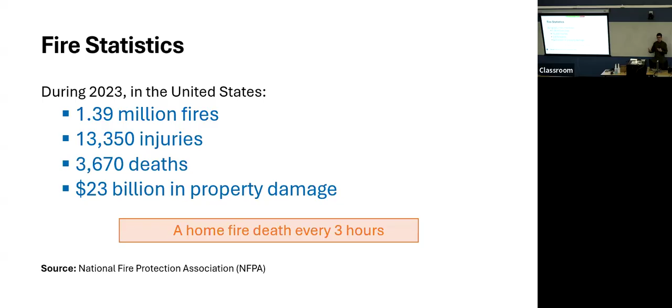And we have to think about it, as engineers, we're going to be building our infrastructure and buildings where people are going to live, work, study, get treated in hospitals. So it's really important for us to understand what the actual behavior of a fire is.

First, let's say we're all here in this classroom having a good time learning about fire safety. And maybe somebody lights up a cigarette in the back of the room, or there's a candle and it gets on the floor. And then we have a carpet, right? This carpet's going to start burning, and that burning is going to start propagating throughout the surface of our floor.

We have wood tables, you guys have your backpacks filled with books, papers. All of these are combustible materials. And as the temperature keeps rising, the flames and the smoke and everything is propagating from one material to another, right?

We even have plastic chairs over here, so a lot of combustible materials inside of this room.

Once we ignite, these temperatures are going to be increasing slowly right after the first ignition, up to a point we call the flashover. Flashover is when these materials are burning, they release gases that are very hot, and they start accumulating on the ceiling because hot gases tend to go up. So they accumulate on the ceiling, and the temperature there becomes very high, radiating into all the materials in the room.

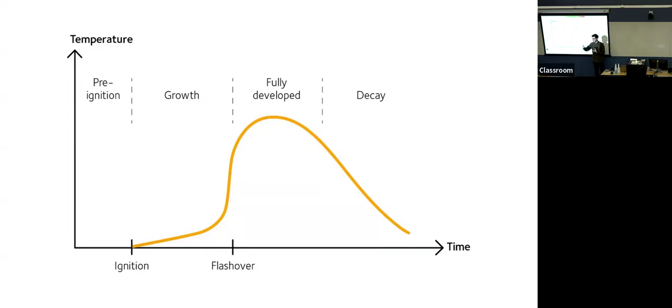As you guys can imagine, if these columns collapse, the ceiling is going to collapse here. I'm going to have a very high load on this floor, and then the entire building might collapse.

When we're designing the structure of buildings to resist fires, we have one specific property called fire resistance. Do you guys know how we measure the fire resistance of a column or a beam or a slab? What kind of units do you use to measure the fire resistance?

Is it a stress value, a temperature value? What do you guys think? Any guesses?

Yes, Ethan - time related, very good. So fire resistance is actually a unit of time. When I'm talking about the fire resistance of this column, I'm going to say that it's 1 hour, 2 hours, 30 minutes. It's not a specific unit of load or temperature or deflection or whatever.

Because when we are designing the buildings and specifying the fire resistance of the structure, we've got to make sure there's enough time for people to evacuate and for firefighters to come in and put out the fire.

So for a very tall building, we're going to need much more time for people to come from the top floor all the way down. But if we have a 1-floor building that has a lot of entrances and a lot of space for firefighters to go inside, we might need a lower fire resistance time.

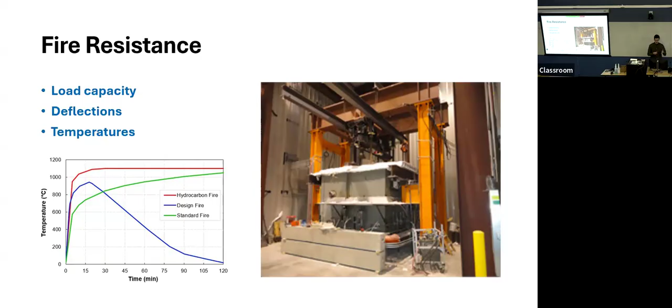So for these three aspects, we are going to assign a time that a structure - let's say we're analyzing this column - can maintain these three aspects in good condition. And we have different types of structures: steel, concrete, timber, and they're going to have very different behavior under high temperatures. Now we're going to talk about each one of them individually.

We talked a little bit about this earlier this semester. So the elastic modulus goes down, and then we have a lot of deformation, a lot of plasticity here. And the timber beam was able to survive the fire - it's even supporting the steel beams over there.

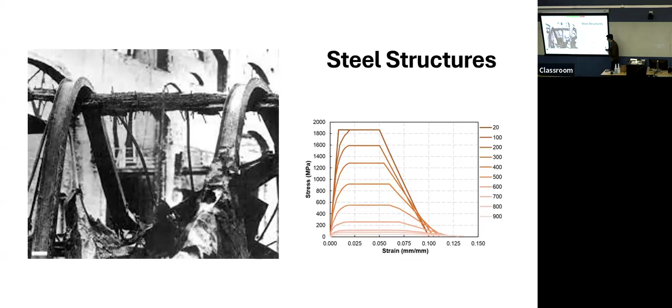The most common way, and it is the most common because it's the cheapest, is applying cementitious spray materials. So sometimes maybe you're in a coffee shop and you look up and you might see like this very rough thing around our steel structures.

So we add this layer of mortar or shotcrete to protect the steel from the high temperatures. This mortar works as an insulating material.

We can also use mineral wool. I also put here intumescent coatings.

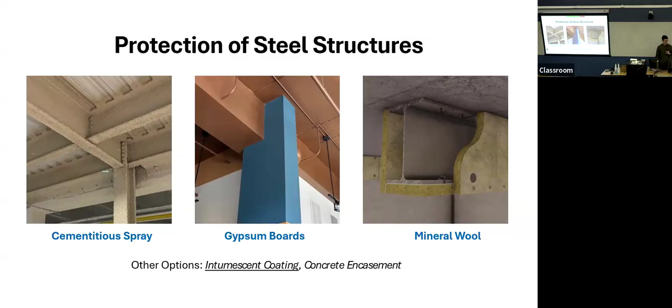Anything else? Any other questions so far? No? Okay, all right, I'm going to share here.

This was a project I worked on a couple years ago. I don't know if you guys heard about this, but this was a fire that happened on a bridge in Philadelphia on I-95. There was a tanker carrying gasoline going into Philadelphia to deliver gas to a gas station.

It was coming down this road, and then the truck took the exit here, so it was going to go underneath the overpass of the highway. The driver lost control for some reason and crashed against this wall underneath the bridge. Then there was a huge fire, as you guys can imagine. I think it was 8,000 gallons of gasoline, so a lot of combustible materials and flames. I think it was 10 or 12 minutes after the crash that the bridge collapsed.

That was what we call a composite steel concrete bridge, so we had steel girders supporting a concrete deck on top. As part of my research, we got the design plans, the original design plans of the bridge, and we started doing some computational modeling.

We tried to model what happened, and we first modeled the fire behavior, so first we needed to determine what temperatures the structure was exposed to. We created the geometry of the bridge, placed where the truck was and the amount of fuel material we had there, and then ran simulations to see what the temperatures were at each point throughout the length of the bridge, at different points within the girders. Once we had those temperatures, we ran a structural analysis.

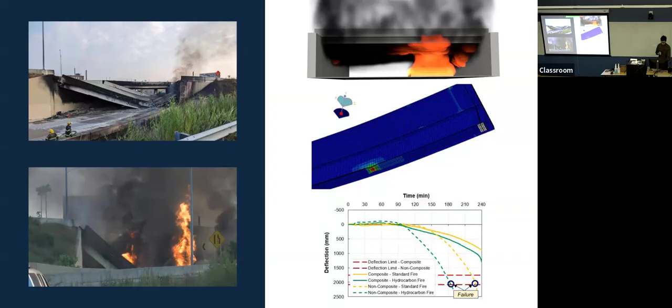Any other questions? No. Okay, so concrete structures next.

So concrete is actually very good under fire because the main thing is it is much more insulating than steel. What you guys are seeing on this first plot is the thermal conductivity of steel and concrete. The line right here below is the thermal conductivity of concrete, and this red line is the thermal conductivity of steel. So it's much higher than concrete, right? You guys probably have already got some piece of metal and exposed one end to heating, right? So it conducts really easily.

So when we have, for example, these I-shaped sections for our steel structures, once we heat one side of the structure, the whole thing gets hot very, very fast, right? Whereas in concrete, once we are heating one of the surfaces, it takes a long time for those very high temperatures to get inside.

And in concrete, for those of you who are in structures, you might remember that it's very good in compression, but very weak in tension, right? So when we design concrete structures, we have to add steel rebars on the bottom to resist the tensile stresses we have on the bottom of our beams. And during a fire, we have to protect these steel rebars because they're going to lose their strength very easily. Remember, we just talked about the fire resistance of steel structures. So when we're designing concrete structures for fire, we want to provide a layer, a thickness of protection, to the steel rebars. And that's how the design codes specify the fire design of concrete structures.

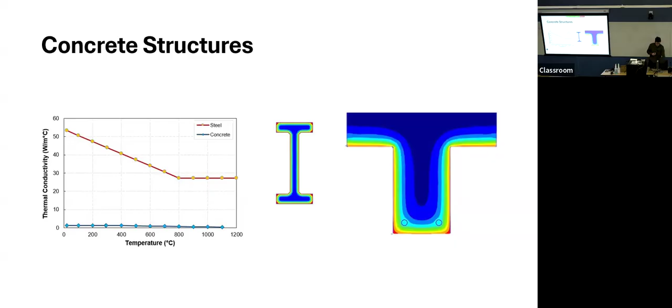Okay, so if you need 2 hours of fire resistance, they'll say you have to have at least 2 inches of thickness here. If you need 4 hours of fire resistance, you need 5 inches of concrete layer. But concrete is not perfect. And there's one little detail here that changes everything.

And this is called spalling. Concrete has a lot of pores, right? And these pores are filled with moisture from water, because we need water to make concrete, right? And when we start heating or exposing our structures to heat, what happens to water? When we heat water, what happens? It evaporates, right? So when water evaporates, that's an expansive process. So you're creating pressure inside the pores of the concrete. And that will cause the concrete to crack and sometimes even to explode.

So there are a lot of videos online. If you look up fire-induced spalling, you're going to see structures with pieces popping out and delaminating. So you're going to have these huge cracks that will decrease the capacity of the structure, because you might have your reinforcement exposed, for example. How can we prevent that from happening? There are different ways. One of the most common ways is adding fibers. Have you guys heard about adding fibers into concrete? No? So, yeah.

Any questions from Zoom? No. Okay.

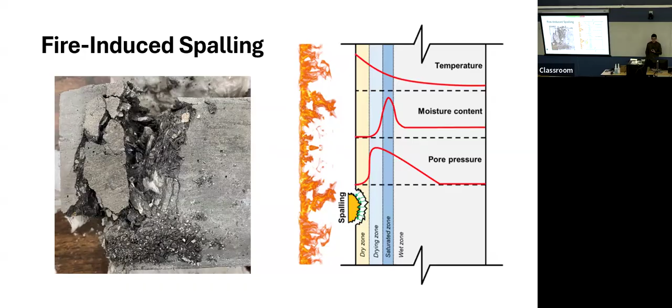Okay. So we can add fibers to concrete. It can be metal fibers, steel fibers, or plastic, and that will change some of the properties. If we have these very high tensile stresses caused by the water evaporation, steel fibers will increase the tensile strength of our concrete, so it will help us prevent that. Another very interesting way is to use polypropylene fibers. Polypropylene fibers melt under elevated temperatures and create voids, so the water can migrate and expand inside those spaces that were previously occupied by the polypropylene fibers.

So these are some of the tests that I've done in the lab. I got some concrete specimens, I put a pressure sensor inside, and I put them in the oven, and then we heat them up and we measure the increase of pore pressure we have there. And once we add these polypropylene fibers, we can see much lower pressure levels inside the material. So we can prevent those cracks and explosive spalling.

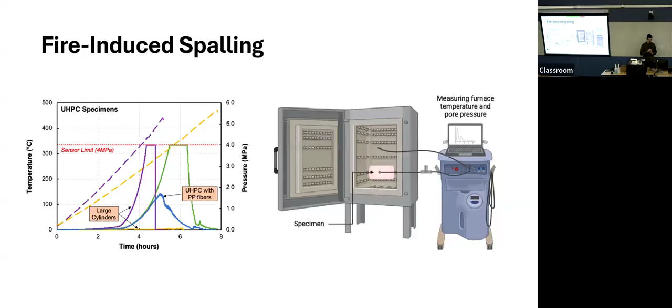All right, so I told you guys that concrete is very good under fire, right? And most of the time, our buildings are not going to collapse. But we have to make sure that the structure is still safe, right? Because the structure is still exposed to high temperatures. So we have to make sure that we still have enough strength so we can reoccupy that building.

And so we have to perform what we call a post-fire assessment. And this is a fairly new topic. We are still doing a lot of research on this because each fire is unique, right? So we have different materials, different geometries, a lot of things that change from one building to another.

And we have a lot of methods and techniques that we can use to evaluate the condition of concrete or other structures. So in this case right here, this building was exposed to fire. We had very high temperatures on the surface, but we don't know how deep those temperatures got inside of the member, right? So what we did is we started collecting samples at each depth through the whole cross section of our structural member, and we analyzed the microstructure of the material. And we are able to identify changes of phases in the microstructure that were telling us which level of temperature was reached there. And with that information, we could backward calculate the residual capacity of those beams and columns in that building and determine if we had a very significant loss of strength.

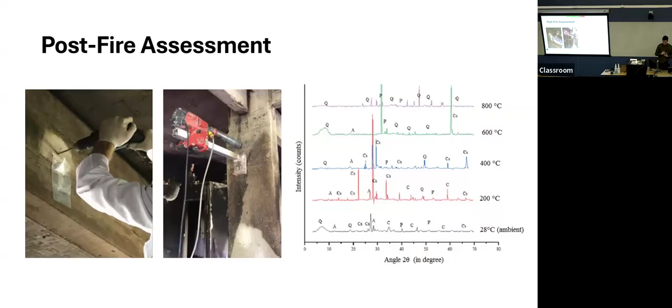So all that will affect our fire conditions. Every scenario is unique. So we are not only on structural analysis anymore. We have the architecture, the conditions of the building, which is pretty much just fire science. We also have material science because we have to understand how the material behaves under elevated temperatures, going back to the microstructural level, because those very high temperatures are going to change the material that we have there. And all that combined will have an effect on the structural behavior.

The last topic that I have here is going to be timber structures. And to be honest, this is a fairly new topic for me myself. I just started studying and working with timber structures. I have two students here that are working with me, Ethan and Miguel. We started working this semester. And what do we have here?

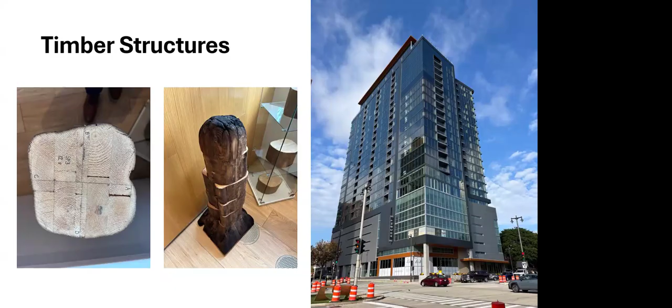This is a picture of the Ascent building in Milwaukee. Have you guys heard about this building? Ascent building, right? What is it known for? Do you guys know? It is the tallest timber structure in the world.

Mass timber is pretty much a combination, we glue together lumbers of different lumbers to make larger structural members. Instead of making a beam or a column of a single tree, we get different slices of lumber from different trees, and we glue them together to make our columns and beams. Doing that is not something new, but we don't have design codes for that yet, so we're still learning and developing that.

So that's why this building is so unique. It was opened, I think, 3 years ago. And every year we have new designs, new solutions coming to the world of mass timber. But one of the main concerns when you talk about building something tall with wood is fire, because you have this very tall building, and if there's a fire here, people need to evacuate. And when you talk about fire and wood, people get scared.

So these pictures you guys are seeing here are the columns of this building. Before building this, they had the columns tested in a laboratory. They have a big furnace, they put those columns inside of the furnace, and then once you burn them, you're going to have a reduction of the cross section.

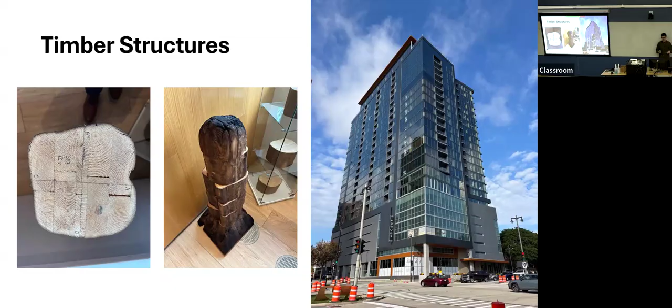One thing interesting about wood compared to steel and concrete: wood burns. Concrete and steel don't burn - they lose strength, they change properties and everything, but they don't burn. Wood burns, but the interesting thing about wood is that once it burns, it creates what we call a charred layer. So you have that burnt wood on the outside, and that layer remains there for most of the time.

That charring remains on the outside of our structure during fire exposure. So when the flames or the hot exposure is hitting the side of our structure, it prevents the high temperatures from reaching the inside. We have pretty much like a sacrificial layer all around our structural members, and we can keep the inside protected, so we have most of the strength still available. That's how timber structures can resist fires. And of course, there are a number of factors that affect that.

So we're now using glue to put wood together.

We have moisture inside of the wood that we need to account for, and that's what we're trying to investigate right now: how different levels of temperature are going to affect the strength of the material.

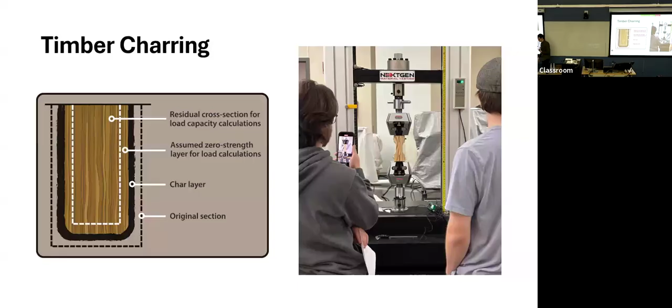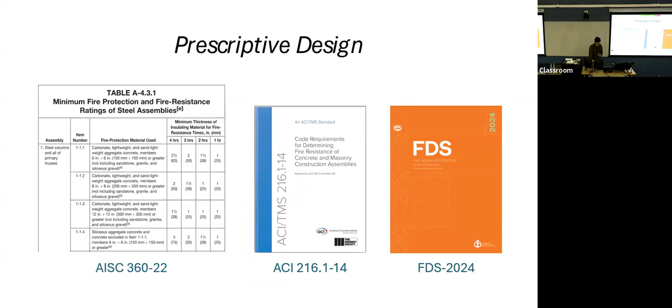But if we're doing performance-based design, we can analyze, run those type of simulations that I showed you guys before, and get the actual temperatures you're going to get in that room, and get the specific material properties. Let's say we are working with high strength concrete.

Let's say we are adding fibers to our concrete that will increase the fire resistance. That's what we call performance-based design.

A very good analogy of that is when you guys are cooking. Sometimes you're just following recipes. So I'm Brazilian, I love steak. I love to do my steak, and sometimes people, like when I was beginning, sometimes I was just following recipes, right? We need 2 minutes on one side and 2 minutes on another, then you're gonna rest it and put it in the oven. Or you're gonna use a thermometer to get the specific temperature. But maybe I like my steak more rare or more medium. So as I learn how to cook steak, I can make it the way I want. I don't need to follow one specific recipe.

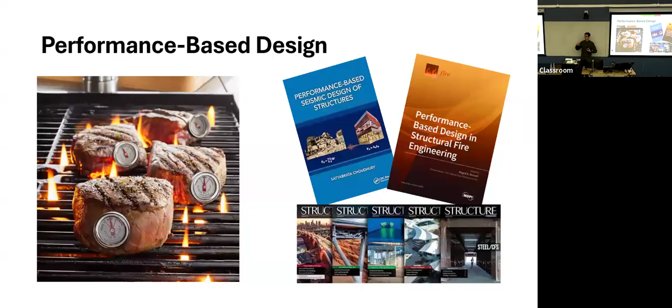So it's just like that when you're doing structural design. One way would be following the recipe as it is. The other way is, okay, I'm going to do these measurements, use the exact temperature inside of the steak to determine when it's good enough for this case. So a few more pictures just illustrating what that would be.

So that's what performance-based design is. I just wanted to mention it a little bit because I think it's something all of you, maybe not right after you finish college, but you'll hear about this as you start attending conferences, technical conferences, and talking to other experts. Or sometimes you'll have one specific project and the client wants to save - let's say you have a huge building.

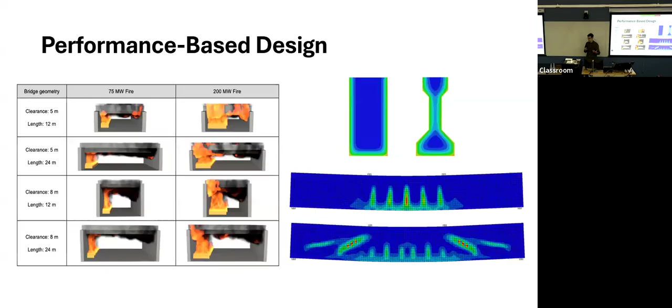Do you need to fireproof all the columns in that building, all the beams? If you guys are following a prescriptive-based design, yes, you have to follow that. But if you guys are able to run those analyses, you can say that maybe you don't need to fireproof all the columns and beams on that building. You can do a selection and save a lot on your design. But it's still being safe, right? So safety is the primary thing.

All right, before I finish here and open for questions, I have this picture, and this is kind of how I got into this field. It was not a random decision on my end - I decided, okay, I'm going to study fire safety from now on. So when I was in college, just like you guys, there was a big fire in a nightclub nearby my hometown.

242 people died - college students, people around my age at the time - in this incident. I got really moved and I wanted to do something to help society. At the time, this particular incident changed a lot of the fire regulations back in Brazil.

And so that's how I started working with this. I had a professor in my university working with fire safety, so I teamed up with them, and it was 12 years ago. Since then, I've done a lot - I shared a little bit of the things I've done over the last few years.

So I'm gonna leave the floor open for questions now, and thank you for your time.